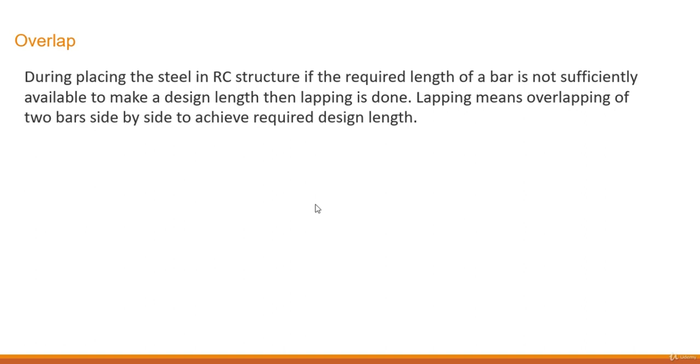Hello, in this tutorial we are going to learn about overlap in reinforcement. So let's see the definition first. During placing the steel in an RC structure, if the required length of a bar is not sufficiently available to make a design length, then lapping is done. So, lapping means overlapping of two bars side by side to achieve the required design length.

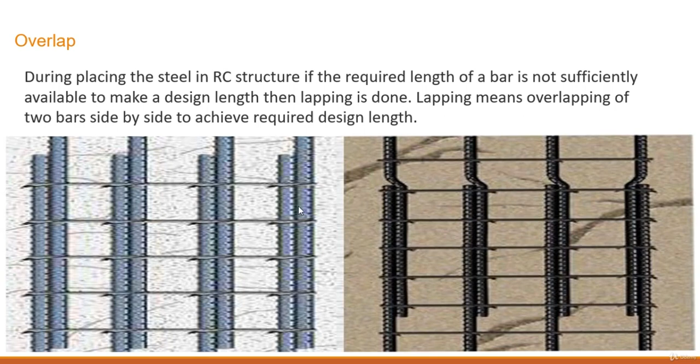And here you can see the example for overlapping. This is the overlap over here between two bars. You can see here and here as well. So let's see the overlap in different structures. First, column neck to column overlap. Here you can see we have this column neck that is starting from the foundation up to ground level. This is called the column neck, and it is going to connect with the column to the superstructure. So this overlap is equal to 40D to 50D.

Now the next is column to column or beam overlapping. It means that if you are going to connect two columns in the superstructure, the lap will be equal to 50D, both in beams and columns as well.

Now the next is development length. And what is development length? This is the development length over here. This is the bend, and this is called the development length. It is going inside the foundation to connect these dowel bars to the distribution bars. So this bend is called the development length, and it will be taken as 16D. Now the general overlapping is equal to 50D. So this is all about overlapping in different structures.

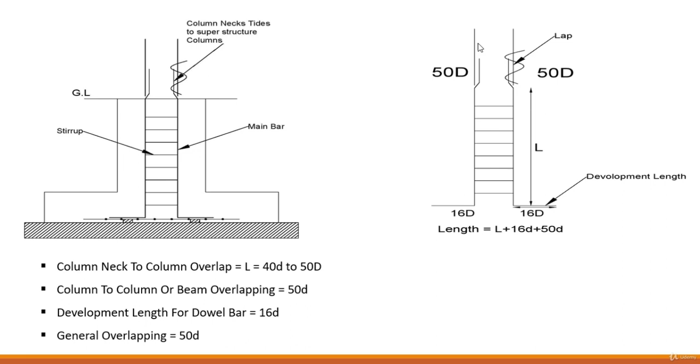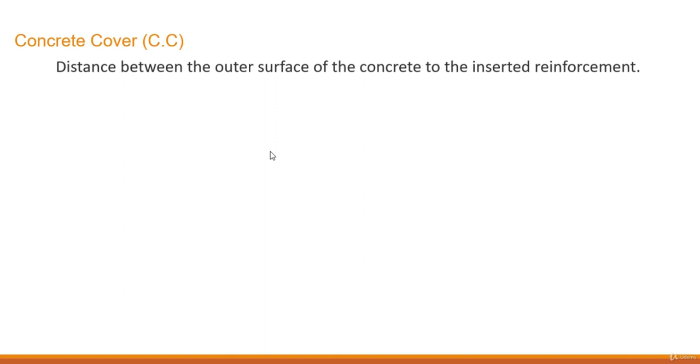Now the next thing here is concrete cover. So what is concrete cover? The distance between the outer surface of the concrete to the inserted reinforcement is called concrete cover. Mainly we have two types of concrete cover: one is called clear cover and another is called effective cover. This is the example for clear cover. It starts from the outer surface of this concrete to the outer surface of this stirrup. And from the mid of this bar to the outer surface of the concrete, this is called effective cover.

And in different kinds of structures we have these concrete covers. For example, in footing the concrete cover is 75 millimeters, column concrete cover we take as 25 to 50 millimeters, beam concrete cover we take 25 to 50 millimeters, and slab concrete cover as 25 millimeters.

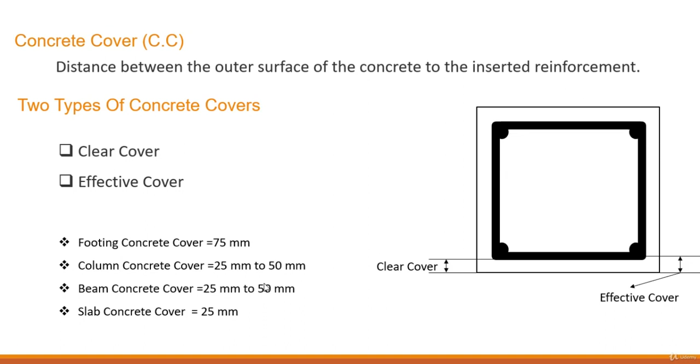Now the next thing here is spacing. Spacing is the distance between two reinforcement bars. Here you can see the bars. We have main bars and distribution bars, and this is the spacing between two main bars. From here to here this is 190 millimeters, and this is an example for spacing. Now in distribution bars we have this spacing, the spacing between distribution bars.

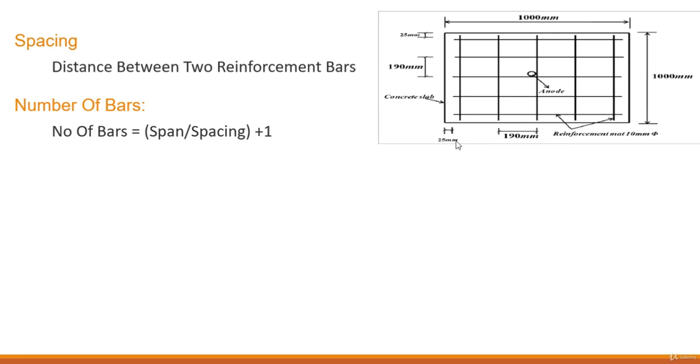Now the next thing will be number of bars. How can we calculate the number of bars? The formula is span divided by spacing plus 1. So what is span? You can see here this is the main bar, and it is going to be placed in this direction, and this is called the span. The span is the direction in which the main bars are placed. We divide the span by the spacing of 190 millimeters and add 1, and that gives us the number of bars.

Now the next thing will be number of stirrups. How can we calculate the number of stirrups? The formula is actual length of column or beam, because we use stirrups in columns and beams, divided by spacing plus 1. Here you can see the longitudinal section of this column, and this is the spacing between two stirrups. This is the actual length, divided by the spacing between two stirrups, plus 1, and it gives us the number of stirrups.

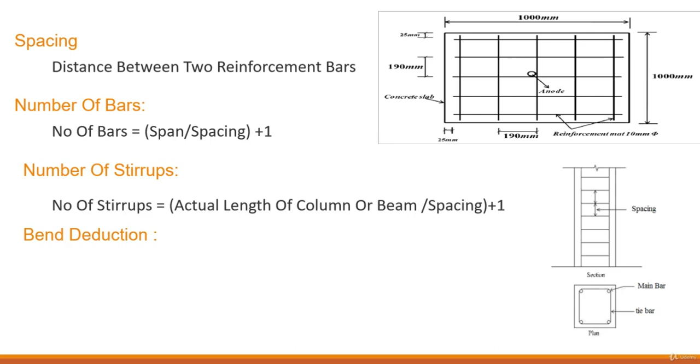Now the next thing is how we can calculate bend deductions. We have bends in different kinds of bars. For example, in a bent up bar we have different kinds of bends: 45-degree bend, 90-degree bend, and 135-degree bend. So how can we calculate the bend deductions? For 45-degree we use 1D, 90-degree 2D, and 135-degree 3D. This is a very important topic, and before moving to the next lesson, make sure that you understand it well.